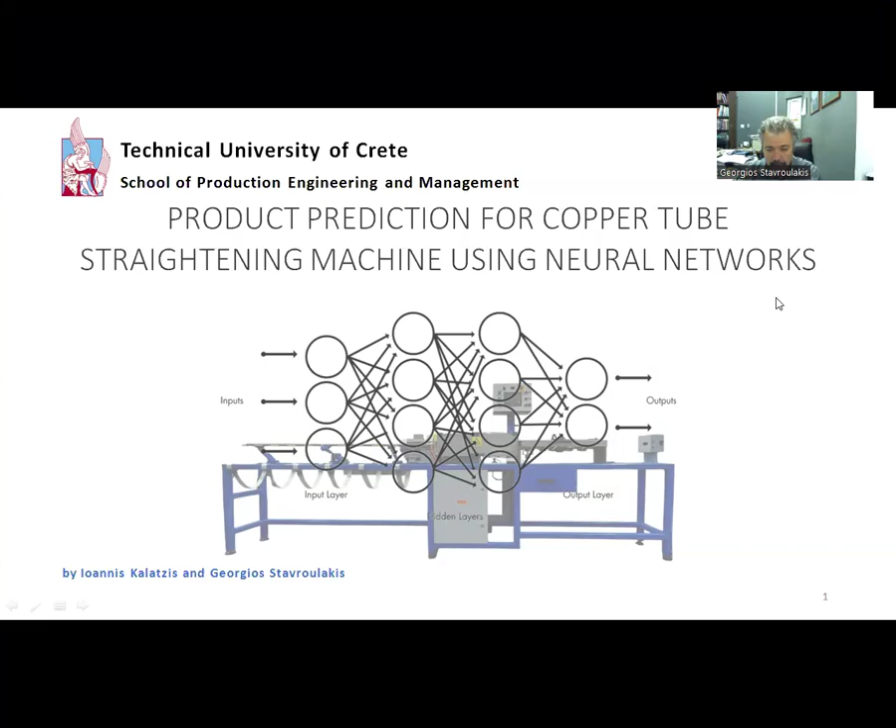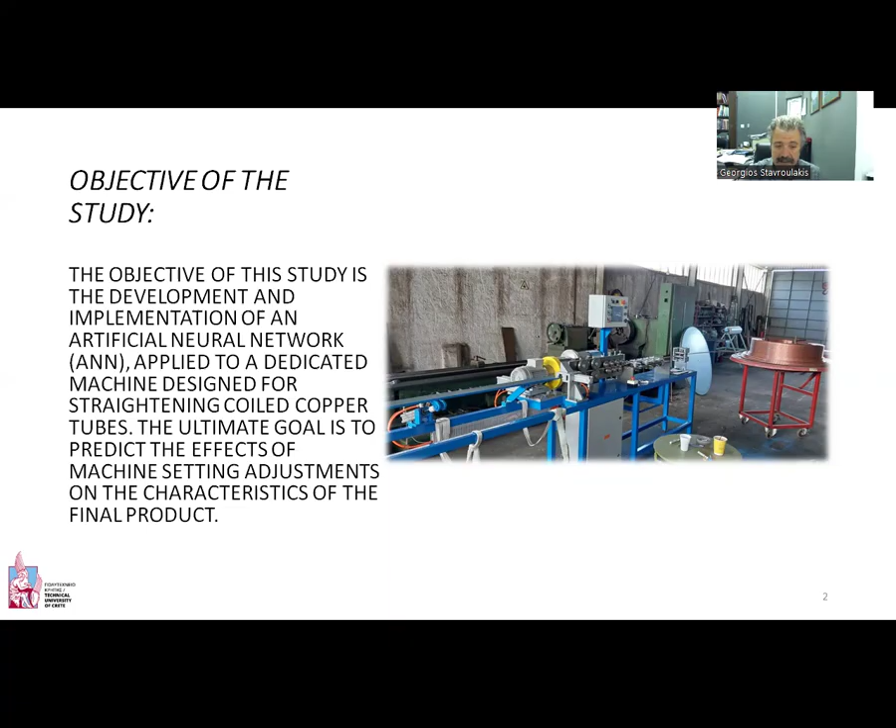Well, the objective of this study is the development and implementation of an artificial neural network applied to a dedicated machine designed for straightening coiled copper tubes. The ultimate goal is to predict the effects of machine setting adjustments on the characteristics of the final product.

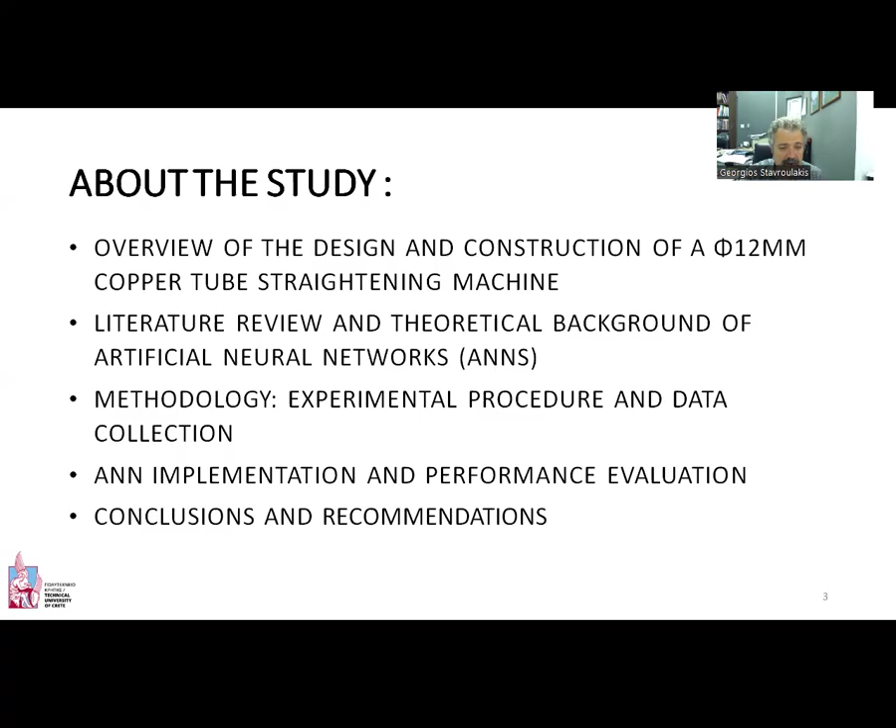The overview of the design and construction refers to a diameter 12 millimeters copper tube straightening machine. Literature review and the theoretical background on artificial neural networks resulted in our methodology that is used based on experimental procedure and data collection. The implementation follows on an artificial neural network realized in MATLAB. Conclusions and implementation hints finish this presentation.

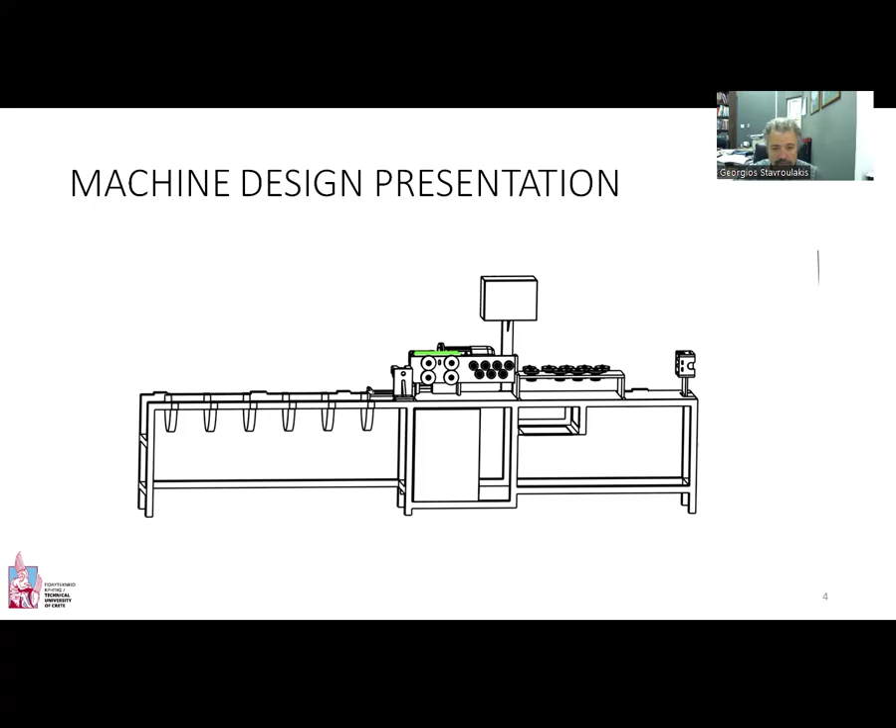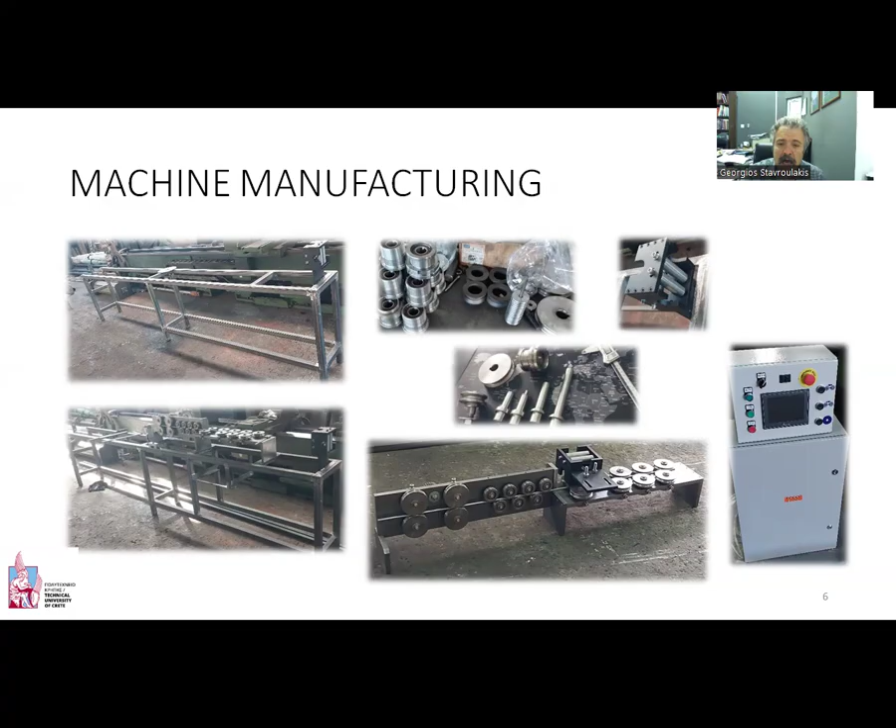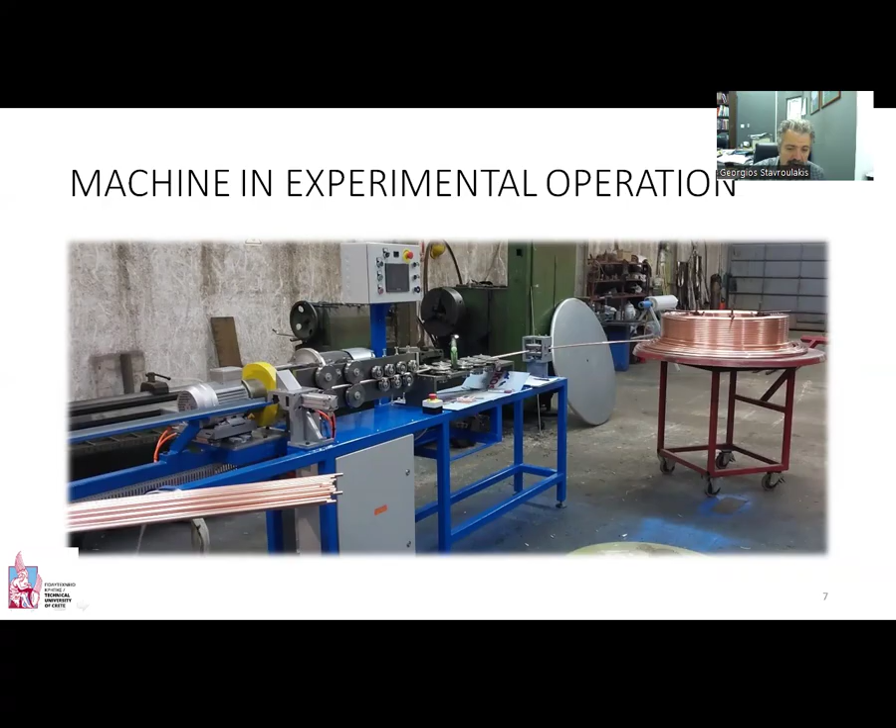This is the overall setting of the machine and the primary alignment mechanisms. These are the photos of the machine that has been constructed for a client of the company of Mr. Kalatzis. This is the setting here together with the copper tube passing through this machine. And on the other side, you see the straightened bars cut at specified lengths.

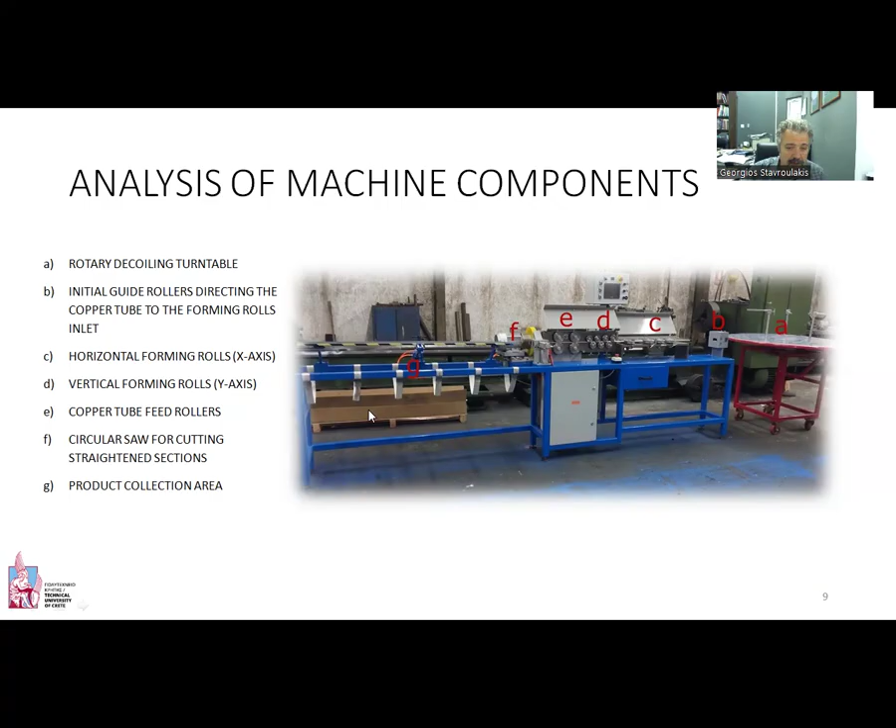This is the final machine constructed, and these are the partial components of the machine from the rotary decoiling turntable, initial guide here, initial guide rollers, horizontal forming rolls, vertical forming rolls, copper tube rollers, and circular saw for cutting the straightened sections and the collection of the product at this part.

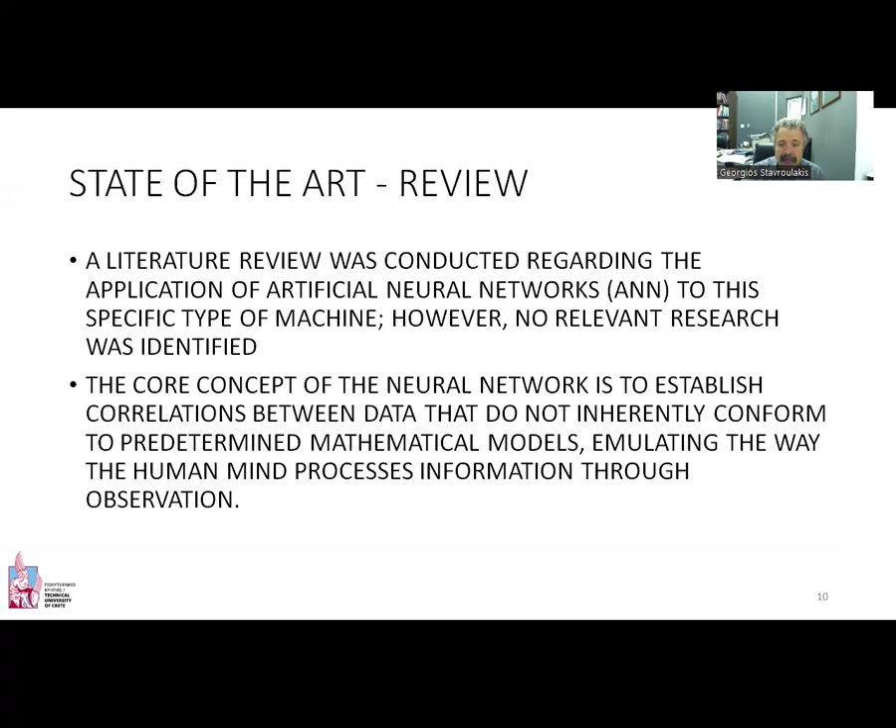Well, for the state of the art, a literature review was conducted regarding the application of neural networks, but no relevant research was identified. The core concept of a neural network is to establish correlation between data that do not inherently conform to predetermined mathematical models, emulating the way the human mind processes information through observation.

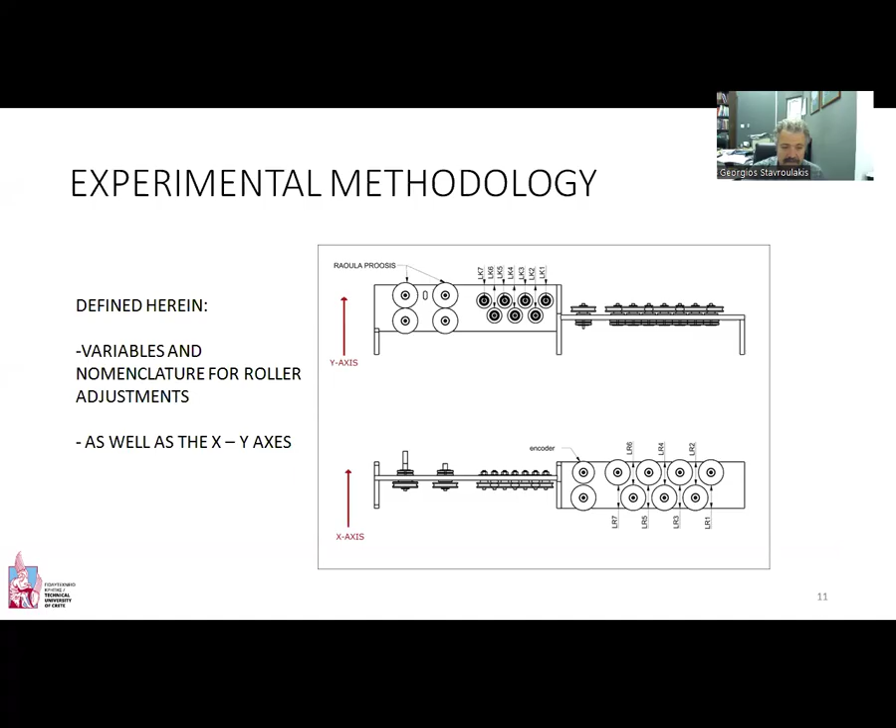These are the different variables that can be adjusted. For example, horizontal rollers are adjusted to a random position at the beginning, measurement of horizontal roller position using the depth gauge, and subsequent logging of the data follows. Extraction and disposal of a copper tube segment equal in length to the entire roll-forming assembly follows. Cutting of a 1 meter sample follows.

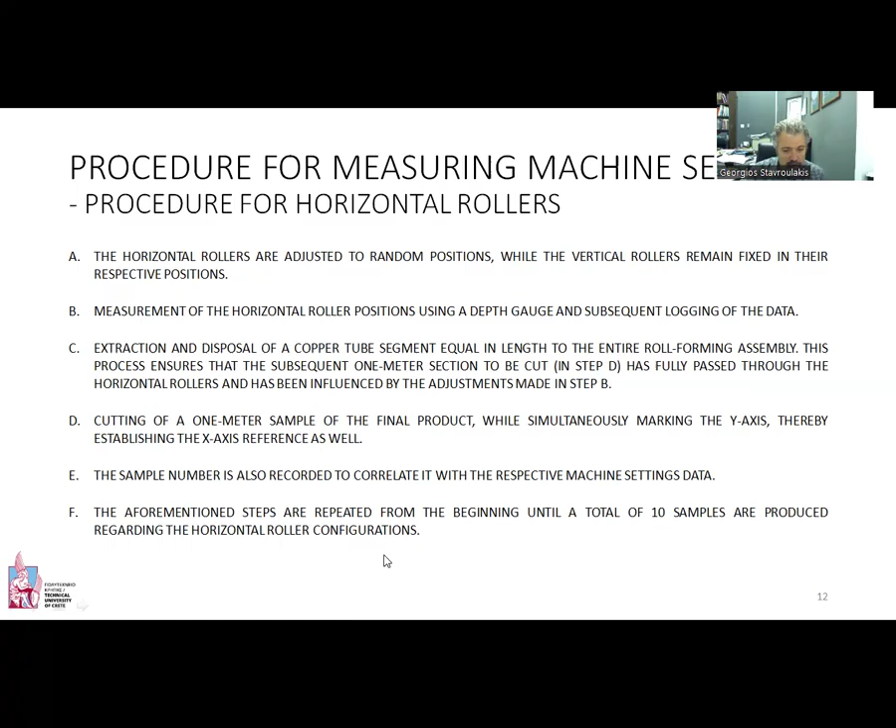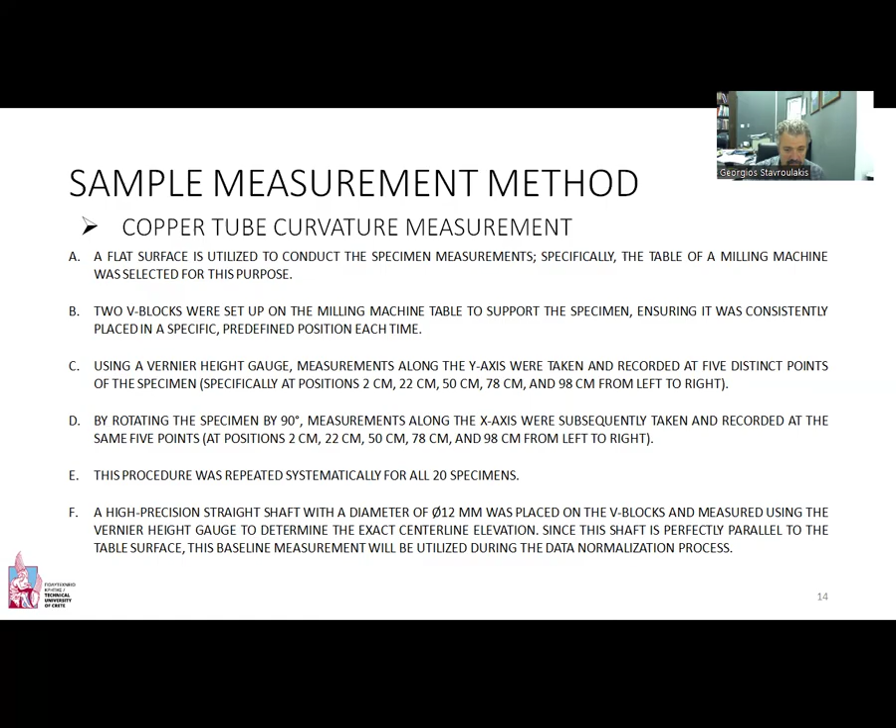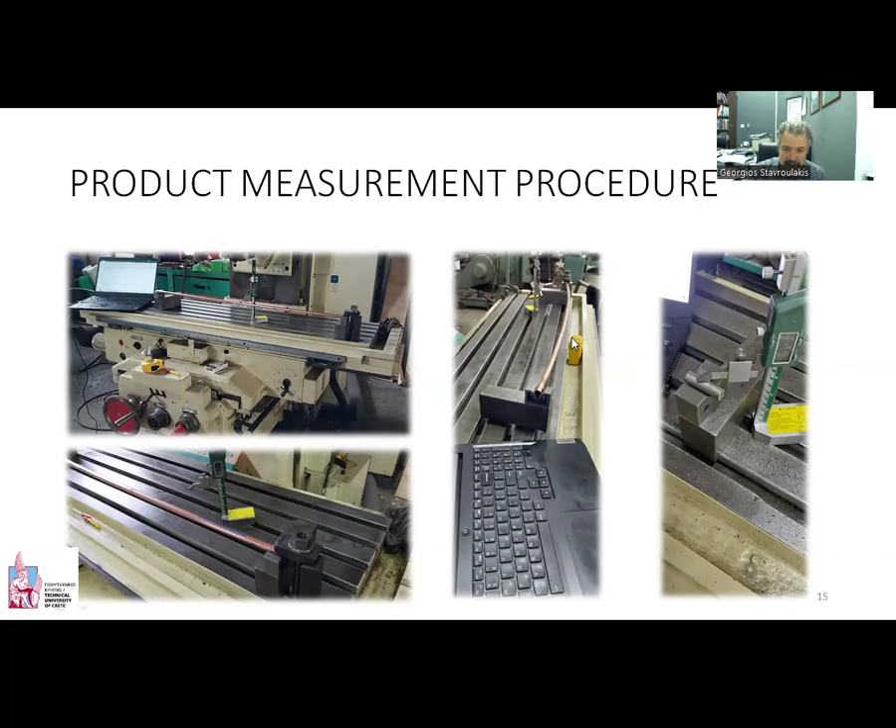The sample number is also recorded to correlate it with respective machine setting data, and the aforementioned steps are repeated from the beginning until a total of 10 samples are produced regarding the horizontal roller configurations, and then the vertical roller configurations follow. The measurements are taken following this methodology. Here are pictures documenting the measurement of the various parts. You see here the part that has an obvious curvature.

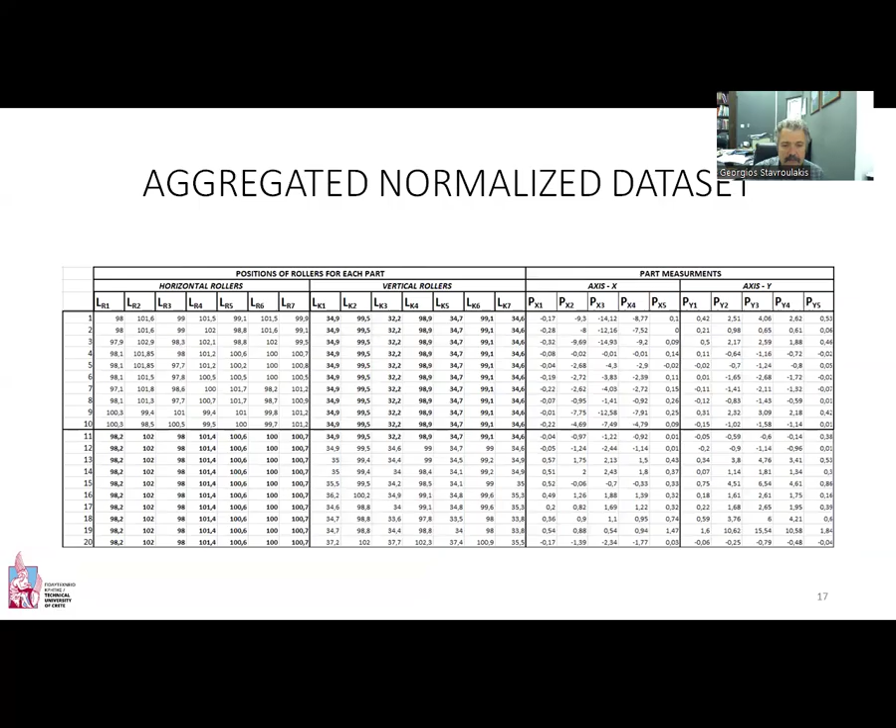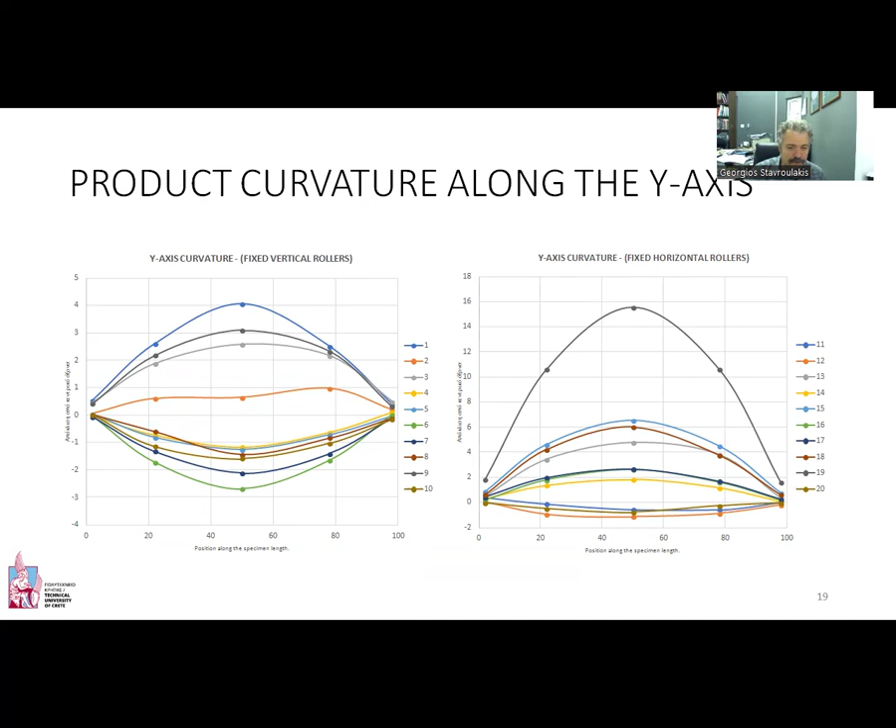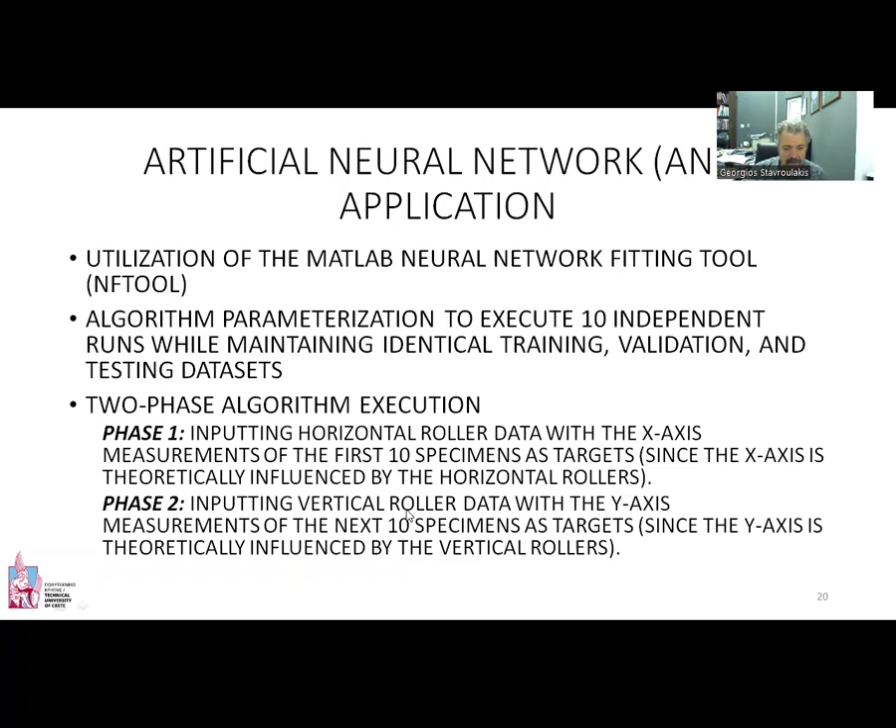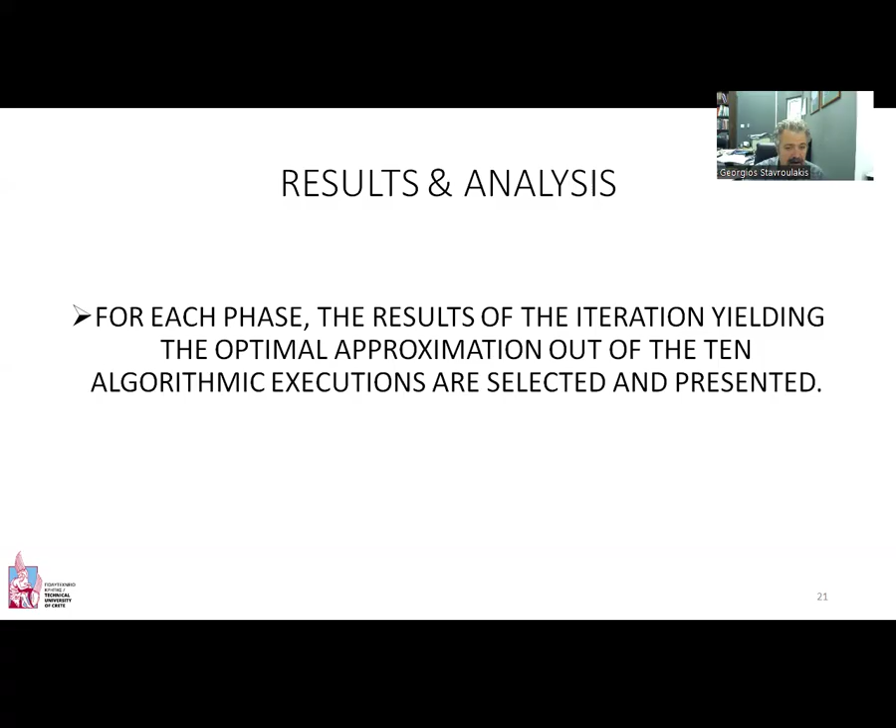Several steps, a two-phase methodology, by putting the horizontal roller data with the x-axis, by putting the vertical roller data with the y-axis, and for each phase, the results of the iteration yielding the optimal approximation out of the 10 algorithmic executions are selected and presented.

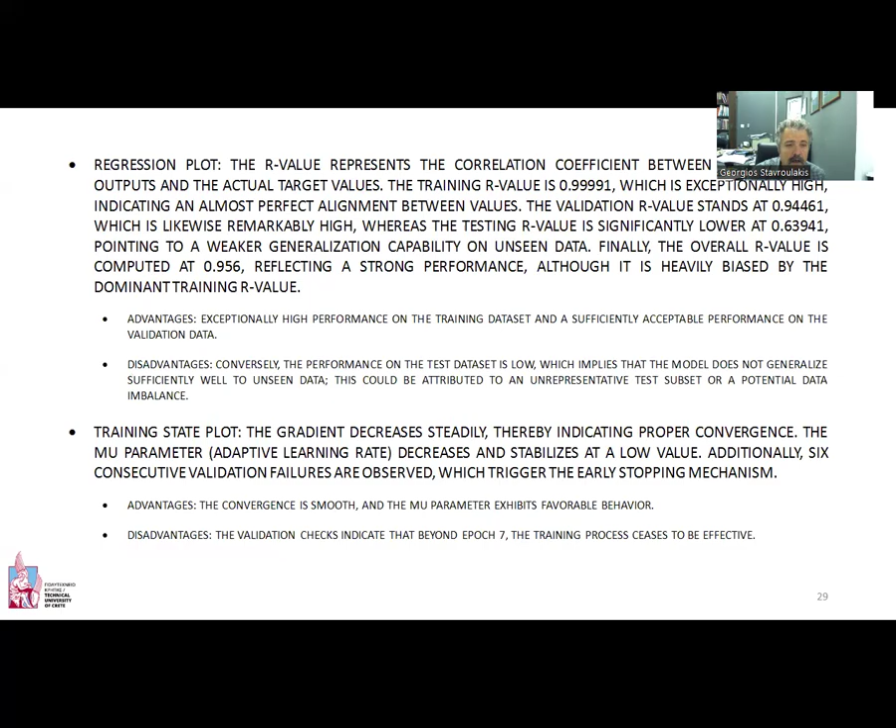Well, in the x-axis, the summary is as follows. The training fit is exceptional with the R-value approximating unity. The validation fit is highly satisfactory. The test fit is suboptimal with a moderate R-value. Regarding the model's generalization capability, it is not highly robust, as clear indications of overfitting are observed.

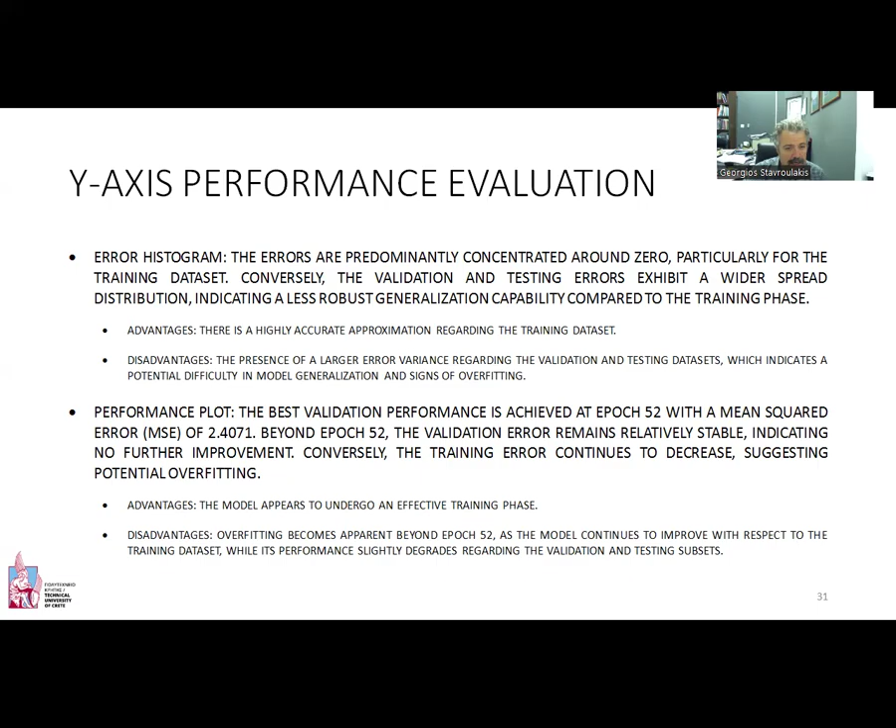The same procedure has been followed for the y-axis performance evaluation. The results are again the following. The training fit is exceptional, the validation fit is strong, and although the testing dataset exhibits an exceptionally high correlation coefficient, the corresponding fit line demonstrates a biased slope deviating from the ideal unit trajectory.

Regarding the model generalization capability, it can be characterized as moderate, given that both the validation and testing errors are noticeably higher than the training error. Well, the overall results and the overall evaluation indicate that the model has not reached an optimal performance level.

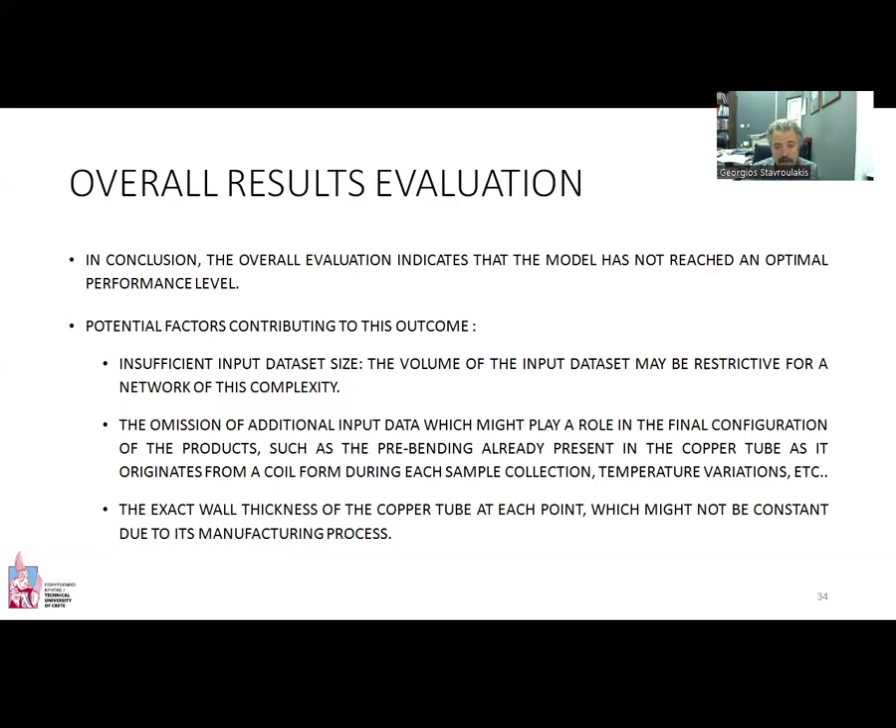Potential factors contributing to this outcome are insufficient input data set size, omission of additional input data which might play a role in the final configuration of the products, such as the pre-bending already present in the copper tube, as it originates from a coil form during each sample collection, temperature variations, etc. The exact wall thickness of the copper tube at each point, which might not be constant due to its manufacturing process.

Some optimization proposals and recommendations for the future. It would be possible to utilize more advanced artificial neural networks. In order to incorporate temporal correlation into the model, input vectors must be structured to include historical data, whereas to establish spatial correlation, inputs must incorporate values from adjacent nodes.

Consequently, retraining could be performed by utilizing tools such as PyTorch Geometric and Deep Graph Library, which are specialized Python-based libraries. And finally, finite element modeling could be used in order to produce additional training data, a kind of fusion of experimental and numerical data that could enhance the performance of the proposed scheme.